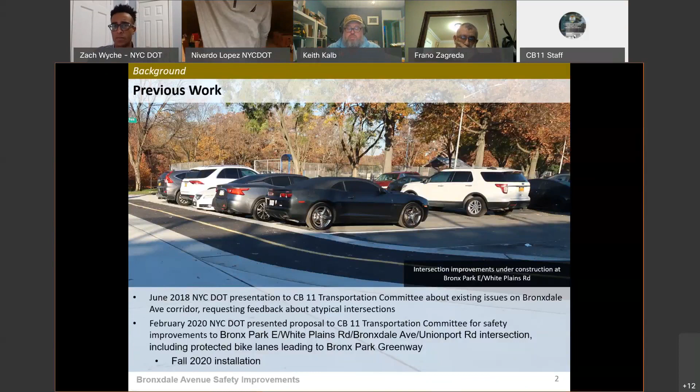So one of the things we did in September of 2018 was the New York City DOT street ambassadors visited 2 locations along Bronxdale Avenue. And we talked to people along the street to hear what their thoughts were about the street, where they go, what their concerns were. The major concerns from people were vehicles failing to yield and speeding vehicles.

So that's what we did on the local level. And since then, on the more citywide level, the city has put out what's called the Green Wave Plan, which is a plan for cycling in New York City, and it's looking at all the fatalities and injuries that have happened to cyclists over the past couple years. One of the big things that came out of this plan is to install 30 miles of protected bicycle lanes every year in the city, which is a lot.

So it means we're looking to install newer designs. We're looking to do more rigorous planning and implementation. And so that means we're going all over the city to install protected bike lanes. Another part of that is the education outreach, which we've put out new safety cards, but it's not just for how to bike safer, but it's also how to look out for people on bikes safer and how to just be safer on the streets that we're all using in various modes.

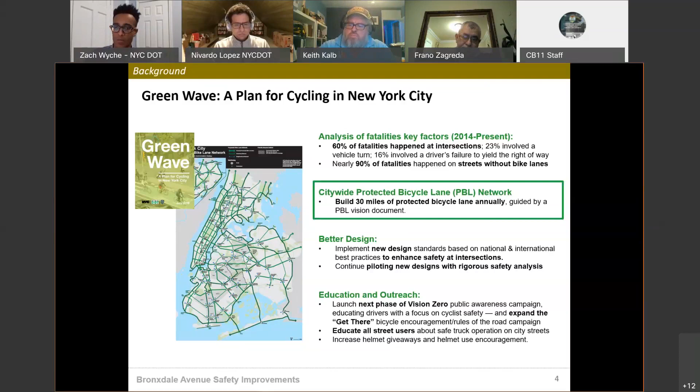So part of the protected bicycle lanes is that we've done a fair amount of research around them. Our study has shown that even though it's called a protected bicycle lane, and you might think immediately that we're going to just add bike lanes, it actually decreases the injuries, the crashes with injuries for everyone on the street, and especially pedestrians, because we're not just going in and putting in a bike lane.

We end up reducing the road width. We end up adding turn lanes. We end up adding pedestrian islands and all sorts of improvements to the street that in general make it safer for everyone, especially pedestrians.

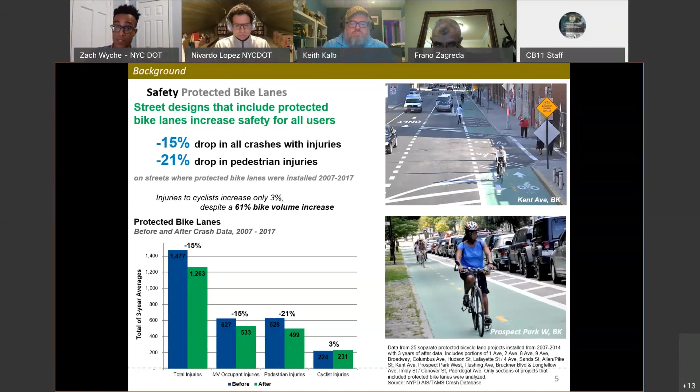So now I'm going to go into the real proposal here. I'm going to talk about the existing conditions along Bronxdale Avenue, and then I'll go into the proposed corridor conditions for the whole length of the street. And then I'll talk about very specific detailed intersection designs that we have come up with.

I want to point out this is another image right under the train around Neill and Hunt and Bronxdale. Someone on a bicycle kind of squeezing by underneath the elevated structure.

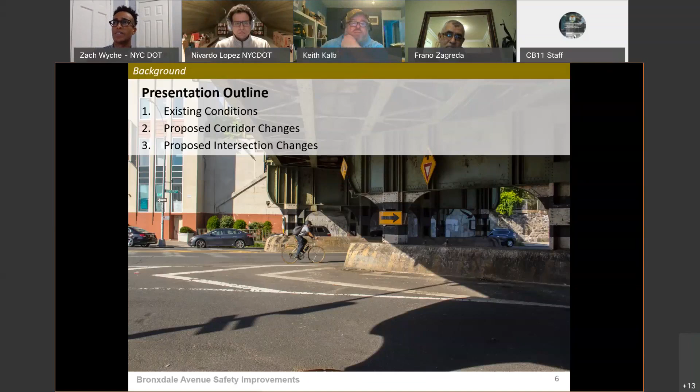So for the existing conditions, there have been 179 injuries on Bronxdale Avenue between 2014 and 2018. It's an excessively wide roadway, and there's a lot of complicated intersections that make it hard to cross, and there's even places where there's no markings for you to cross there, but you might want to cross there.

I also want to point out that there was a fatality on Bronxdale Avenue. A person was hit by a car while they were walking. And so that's something we really want to take into account when we're thinking about how to improve the safety of a street.

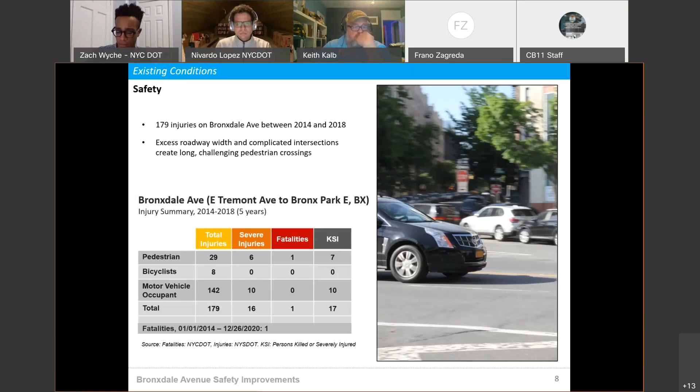So here's an image of Bronxdale Avenue. It's 60 feet wide with 2 lanes in each direction, parking on each side of the street. If someone wants to ride a bike, they'll be riding in between the parked cars and the moving car in an unmarked space, just sort of in the travel lane.

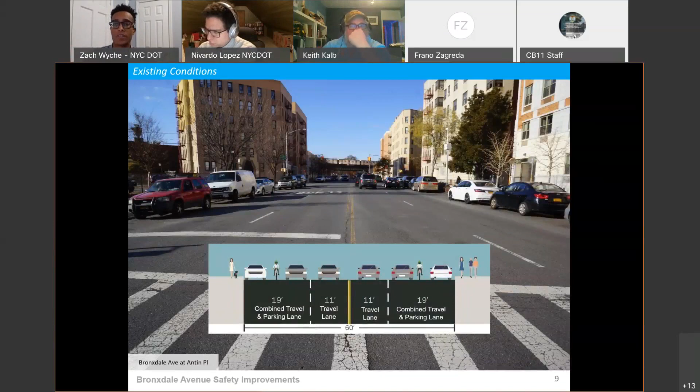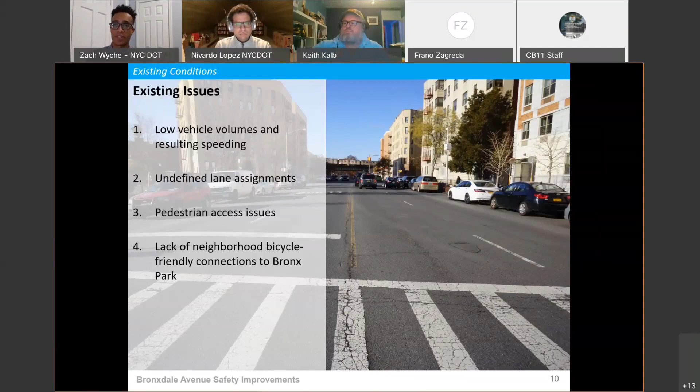So what does a street like this have issues with? First off, Bronxdale Avenue has pretty low vehicle volumes, resulting in speeding. There's also undefined lane assignments, pedestrian access issues, and a lack of neighborhood bicycle-friendly connections to Bronx Park. I'm going to go into detail over these few points here in the next slides.

So this sort of encourages speeding. For everyone that drives, if it's kind of empty, you might go a little faster, put your foot on the pedal a little heavier, since there's no one around. And when we did a speed test, we found that 84% of the vehicles were traveling above the speed limit, and 46% of those were traveling 5 miles an hour over the speed limit. So even more than just slightly over the speed limit.

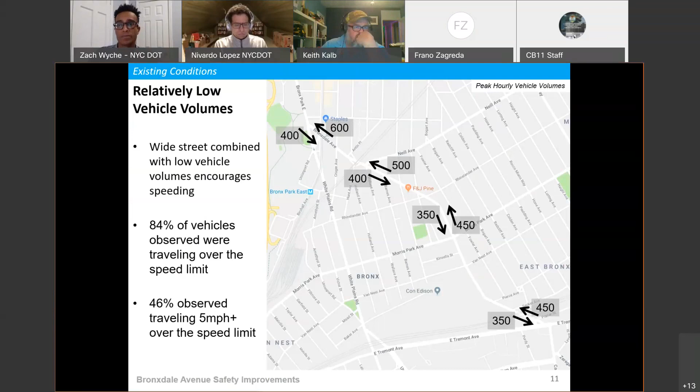For the undefined lane assignments, this goes into some of the markings on Bronxdale Avenue. There's 2 lanes in each direction, but they're not marked for turns or anything like that, so people are just driving forward in whatever lane they want. But when you want to make a left turn, you end up pulling over to the leftmost lane and slowing down, and while you're doing that, people behind you give you what we call back pressure.

So these cars are coming up behind and they might honk or just stare at you in your rearview mirror, and it pressures you to want to go forward quicker. So you might not see the pedestrian crossing here, or the car coming here, and this creates a situation that could get more dangerous and cause a crash. The other thing that happens is someone coming up behind you might want to change lanes next to them, which also could cause a crash while switching lanes at the last second. So this is something we wanted to look at while redesigning the street to try to fix this.

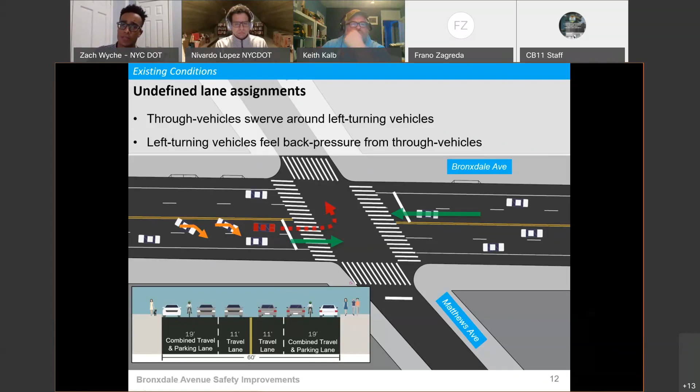Then there's the pedestrian access issues. Bronxdale Avenue is a very diagonal street compared to most of the street grid around it, so it creates a lot of wide intersections with crossings that are long and challenging. Even here, you can see in the picture at Antin Place, there's not even a crossing for one of these crossings, and it's sort of skewed.

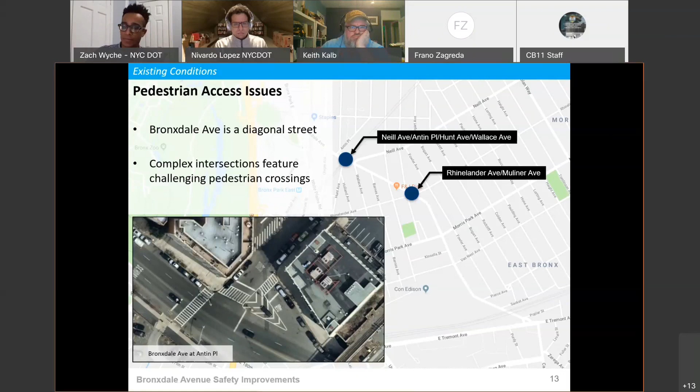There's also the lack of local bicycle connections connecting to Bronx Park. The neighborhood has all these greenways around it, but when you look at the bike map, there's really no bike lanes that connect to the park itself very directly. There are some recent bicycle lanes in the neighborhood, but the greenways don't connect to it.

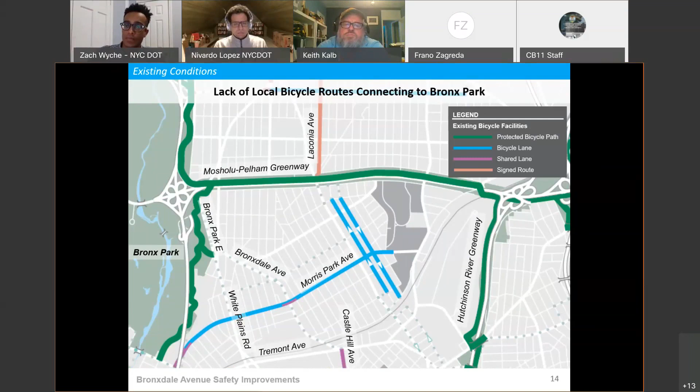For the proposed corridor changes, we are proposing to install 1 travel lane in each direction plus a left turn bay to relieve the back pressure. This would also include protected bicycle lanes and pedestrian islands at as many crossings as possible. This would shorten the pedestrian crossings by a significant amount, and it would ideally reduce the speeding along the corridor because we're tightening up the roadway, so people drive a little slower since it seems less empty. This would also organize the traffic by having separate bicycle paths, pedestrian islands, and turn lanes.

Doing all these changes would mean that we repurpose about 5 parking spots per block. When you think about the corner and the pedestrian islands, that ends up being about 5 spots per block, which means about 60 spots total for the whole corridor.

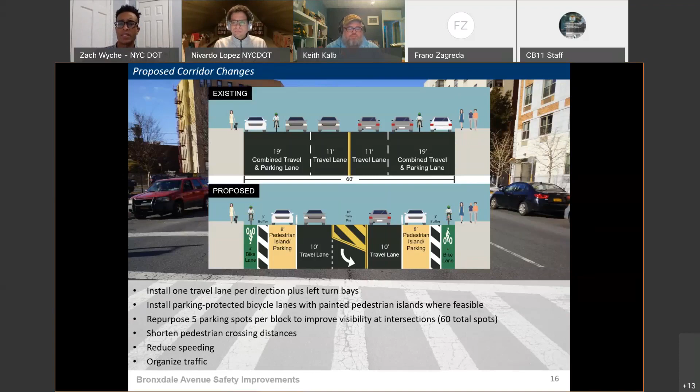This is a parking protected bike lane, which means that bikes get to be in their own lane, cars get to be in their own lane, and they don't have to mix with each other. In general, it's narrowing the roadway to discourage the speeding.

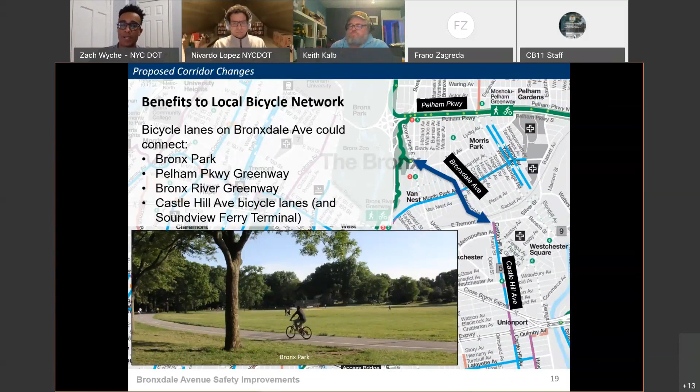This would also benefit the local bicycle network because it would connect directly to Bronx Park, and then you could connect all the greenways, which I know I've taken all the way to City Island. We'd also connect to Castle Hill Avenue, which if you take south, you can get all the way to the Soundview Ferry Terminal. So that could be a fun trip to take the bike to the ferry, or you could do it for a commute if you're heading further south. So those are for the whole corridor.

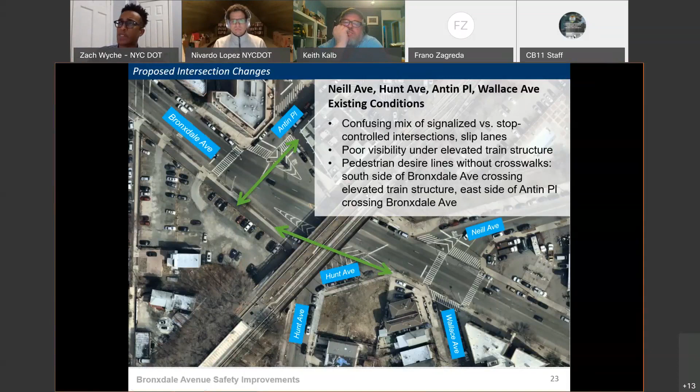So I'm going to go over our design piece by piece here because it's a lot of pieces. The first part is at Antin Place and near Hunt Avenue along Bronxdale, right in front of the medical pavilion. The first change is to add a crosswalk so that someone can cross on both sides of Antin Place.

The second part would be to remove this slip lane that has a stop sign -- in the existing condition, even if someone goes into here, they have to turn right back onto Bronxdale Avenue. So we're proposing to close the slip lane. We'd still leave a little opening in case there needs to be a delivery or some emergency situation to get to the medical pavilion. But in general, it'd be all pedestrian space, and you'd be able to just cross here at Antin Place and then keep going down the street.

Yes, so that's that for here. We're going to move across the street.

So here along Bronxdale Avenue, there's a big slip lane where people cannot cross down Bronxdale Avenue. They have to wait for a gap and jump across the slip lane here. A lot of people end up walking in the street right where this car is to get around the barrier.

So we wanted to normalize the way that people walk down the street, where there's a lot of people that just walk in the middle of the street here. And by reducing Bronxdale to one lane in each direction, we have enough room, not just for pedestrian space, but also for a bike lane too.

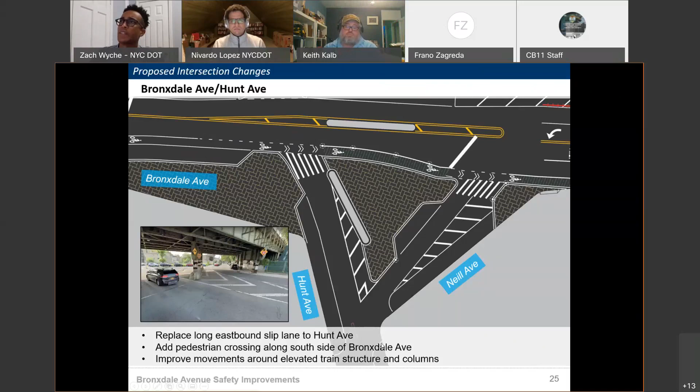And this means that we also harden the turn. So we're not fully removing the turn, but if someone wants to turn down Hunt, they have to make it closer to a 90-degree angle. That means they have to yield a lot more and not just take a turn at full speed like a slip lane. We also fit in a little bit extra parking under here on this island and add a lot more pedestrian space to make it walker friendly.

So the last section is at Neill and Hunt on the northern side. There's another slip lane with a stop control that people can just cross while the signal's doing whatever it's doing. On this one, unlike at Muliner, we can close this fully and have people just make the turn at a 90-degree angle.

So that also decreases the crossing distance from about 100 feet to about 30 feet because they're missing the whole slip lane. And we add turn lanes like along the whole corridor, and we remove the confusing stop controlled signal.

So all in all, we're removing all the slip lanes and changing one of them into a turn. And then we're also adding 2 new pedestrian crossings with this proposal.

One thing that's not in the drawing here is to the south at Hunt and Holland, there's a big open space with a lot of buffer area that we could add some extra parking spots, because in this whole rearrangement some of the parking spots get repurposed. So that's somewhere where we could fit some more parking to not take away all the parking around this intersection.

So in summary, we're reducing speeding by narrowing the roadway and removing excess vehicular capacity. We're improving the lane organization with left turn lanes and bike lanes. We're shortening the crossing distance with painted pedestrian islands. We're installing family-friendly protected bike lanes to Bronx Park. And this proposal also simplifies the irregular intersections and improves pedestrian access by installing new pedestrian spaces and new crossings.

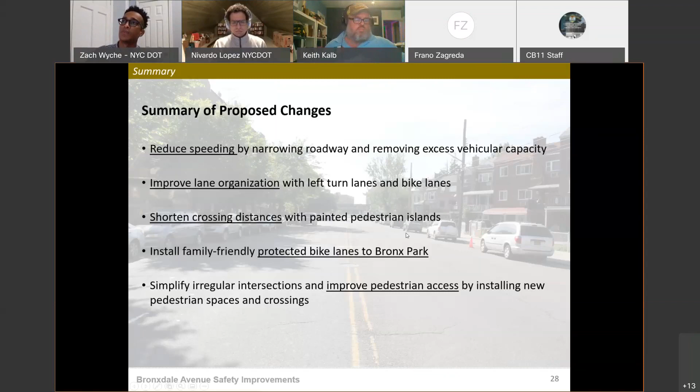Good job, Zach. Hello, can you guys hear me? Yes, yes. Hi, this is Officer Mederos of the 49th Precinct. How you guys doing tonight?

Good, good. I have a question, if you don't mind. I noticed that, I think maybe page 25 or 26 of the presentation, you had Bronxdale Avenue and Antin Place, the medical pavilion, I think you called it. One of the slip lanes that you mentioned first, yeah, that one.

You said that you were going to leave an opening for vehicles to travel into what used to be the slip lane so that they can do their medical drop-offs or deliveries. My concern is that slip lane is pretty commonly used for that particular location. I don't want to say heavily traveled, but it's definitely used for dropping people off and picking people up. Would there be any way to maybe put signage there to control the types of vehicles that can go onto that slip lane?

Or maybe I'm not explaining myself correctly. Am I being confusing? Oh, that makes sense.

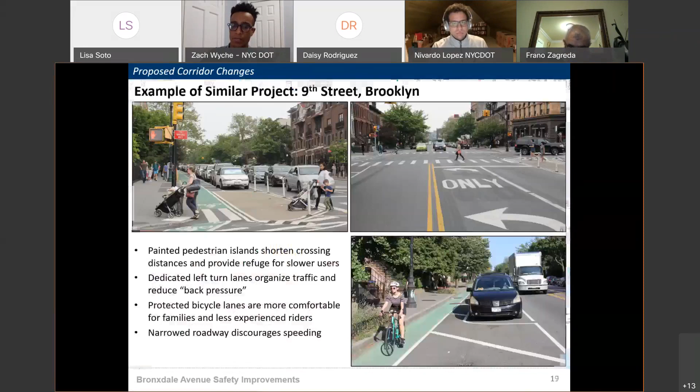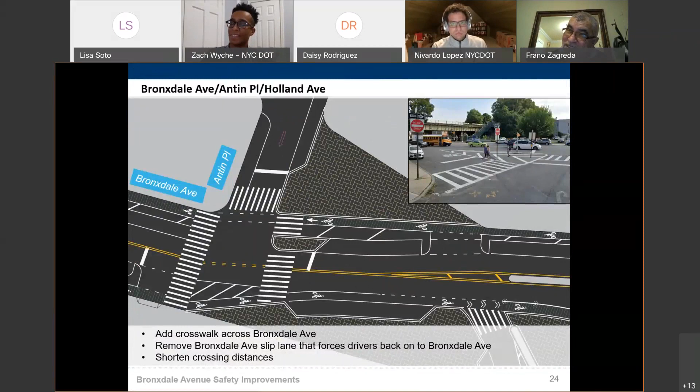Yeah, so that's some of the offsetting we've already tried to do in this design. So we still end up at the net 60. Okay, so it sounded contrary to that—it sounded like we could pick up some parking spots. So I guess you misspoke.

Yeah, maybe I sounded a little more hopeful than I should have, but one of the locations—yeah, so there's this location here where we could fit in a few more spots, but it's like maybe 6 spots, 8 spots. Well, 8 is better than nothing.

Yeah, I was gonna say, yes, 8 is definitely better than nothing, because the problem with this area—again, because I live here—there are other parts of the Bronx and the city in general where if you can't find parking, you just put your car in a parking lot and deal with the fee. But there's not even that option around here. If you come home late at night, you can literally drive around for hours and not find a parking spot.

So yeah, any spots that you can give as part of this plan, the more the better. Anything would be appreciated.

If nobody else on the committee has questions, I have two more. I'm sorry, I was taking a lot of notes. I missed this if it was mentioned, but do these plans affect any of the bus routes? No bus routes are being changed.

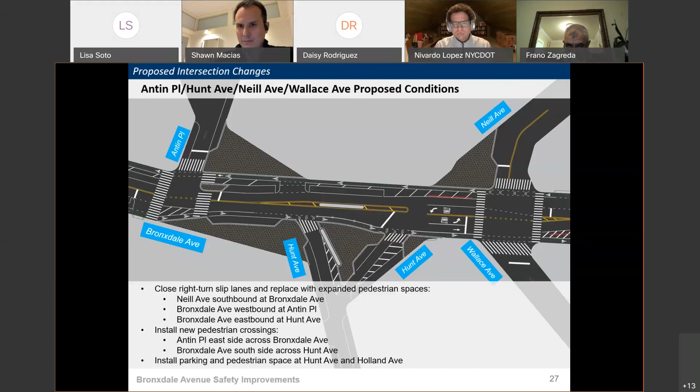My last question, on this slide — I think it's slide 26 or 27 — on Neill Avenue, isn't that two lanes coming onto Bronxdale Avenue? Are you combining those two lanes into one? Right now it winds up being two lanes, but I can't tell from this drawing if you're turning two lanes into one. It looks wide and then gets narrow. It is changing — at the very end it turns into two lanes again with the stop sign there.

Yes, we are combining it, but we did a traffic analysis and it all seemed to fit into one lane. There will be appropriate signage to let drivers know it's merging from two lanes into one, farther back from the intersection. You can see how right now it splits into two lanes, one going right and one straight, but in the new drawing those two lanes are pushed together into one, where people will either turn right or left. Yes, we would put the proper signage out.

Is there a reason you have to do that? Can you just leave two lanes close together, one right and one left, instead of splitting it the way it currently is?

I'm looking, hold on, I'm actually checking in with the aerial right now.

The reason we're looking to condense this into one lane is there's a primarily pedestrian benefit here. Folks crossing here have to cross two different travel lanes going southbound, plus the lane going northbound. We think having two lanes that close together is a little bit redundant. If the traffic volume was very high to warrant keeping both lanes, it would be hard for us to remove, but the traffic through this area is not in the amount where these two lanes are needed.

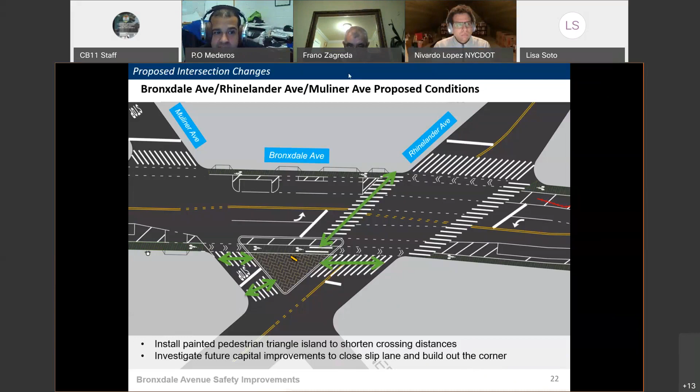Is this the first part of your presentation, or will there be further meetings with other parts? I noticed that a very large strip of this project is kind of missing from the presentation, like the area of Morris Park and Bronxdale, or even Van Nest and Bronxdale.

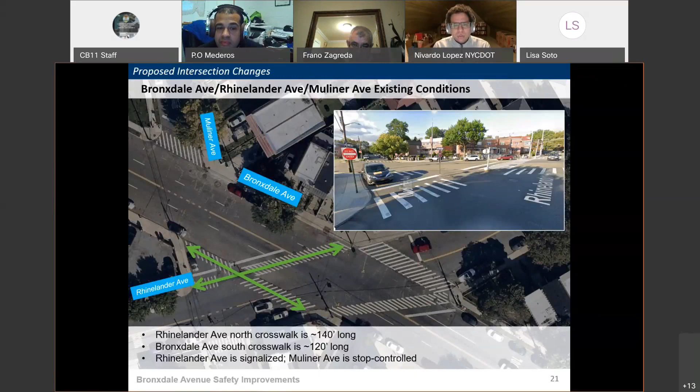Well, at those locations, the reason we didn't show every single intersection is that the intersections we've shown are going to be standard throughout. We focused on the intersections that will be a bit different from the standard design. The intersection of Bronxdale and Matthews is a good example. Other intersections, like Bronxdale and Morris Park, that we didn't show are going to follow this design. For the purposes of brevity and efficiency, we wanted to focus on this standard design, and only show the intersections where we're deviating from it. If an intersection isn't shown in this presentation, it's because it's going to look like Bronxdale and Matthews.

Gotcha. It's something we can meet with you about and go over in more detail. We do have the drawing for the whole corridor, so if that would help, we can definitely schedule that meeting.

No, that's fine. The reason I'm asking is, in particular, the area of Van Nest Avenue and Bronxdale Avenue, the location of the Van Nest Academy. My concern is that if that particular area fits the diagram currently on screen, we might have trouble once school gets back to normal and goes back into session. We have major double parking problems in that area, and I've been dealing with it in collaboration with the school principal and with our different traffic units for a long time, and we still have very big double parking troubles there.

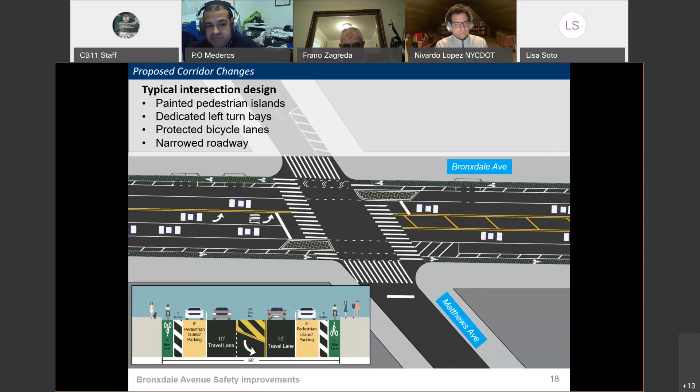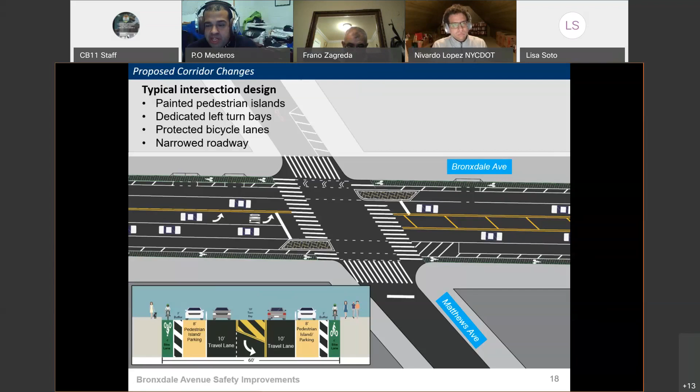But I guess that's a separate issue from this. My concern would be, would there be room for any type of editing of the design just for that particular location, to make sure students are safe going into the street? Because it looks like from that design, they're going to have to go into the street to reach the buses by crossing the bike lanes.

And is there any plan to mitigate the level of double parking that's going to occur, and probably flat-out traffic lane blocking that's going to occur once school fully comes into session?

So the main tool we have is curb management and rethinking the regulations that exist there. But this is something we're going to want to discuss with the school, and it probably makes a lot of sense to have the 4-9 precinct involved when we speak to the school, because enforcement is going to be an important piece of this.

So they are definitely, I mentioned them earlier in the presentation, one of the key stakeholders we have to speak to before finalizing this plan and implementation.

I think it's important that when we present these designs, we are not looking to encourage or facilitate any illegal behavior. We understand that it happens, and oftentimes double parking is a result of curb regulations that don't match the need. So we have to rethink that and figure out what could be done to get folks at the curb for these pickups. But we're not going to design something and let folks say, oh, double parking's okay. That's not what we've done in other locations.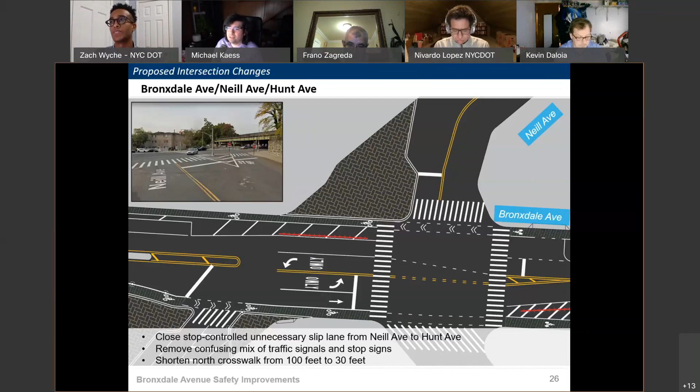This is still kind of like the AutoCAD drawing - thick bollards, the thick plastic ones? Yes, and they're all connected on the bottom, on the side of the road. They're not just individual posts. The thing is about those, they tend to get destroyed by snow plows and things like that. That's why activists tend to argue for more concrete instead of the plastic bollards.

I think here, this is why we just tried to design our bike paths and the space wide enough for sanitation to come through and not hit them. We're also going to talk to sanitation, of course, but we do have the maintenance capacity to, when one gets hit, go back out and repair it right away.

And also regarding the school, I know you had the example of Skillman where you had a school, but do you use bus boarding platforms at schools like those on Southern Boulevard? So those are often used where we're putting a bike lane in front of an MTA bus. The reason there is the MTA bus runs a lot more frequently than a school bus. School buses tend to run at very specific times infrequently throughout the year, whereas an MTA bus is going to run pretty regularly, in some cases 24/7, other cases 14, 15 hours a day. So right now we're just using those bus boarding platforms in locations where we're not able to extend the sidewalk and where it's for a New York City Transit MTA bus.

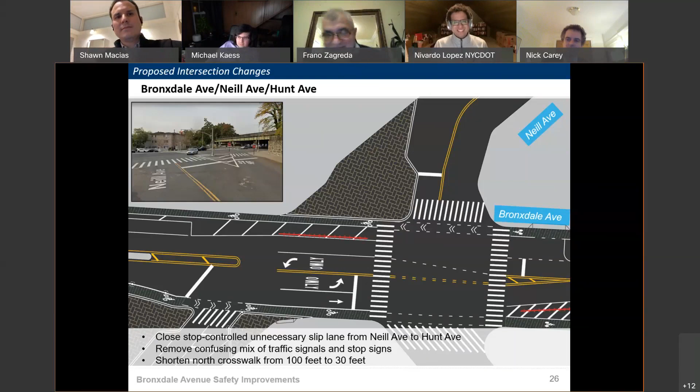Oh, and before I get off, Lisa, I know the last time we spoke back in November, you had a question about some hummocks, I think it was on Lydig. I haven't forgotten about those, so I still owe you a response. Yes, I was going to ask you, but I feel like I pummeled you with enough questions tonight. That's okay, you could also email me directly if you have other questions. I haven't forgotten, and I can definitely follow up - it hasn't changed, I drove down it the other day. All right, perfect, I'll follow up with you later this month. All right, thank you. Have a good night, everybody. Good night, thank you.